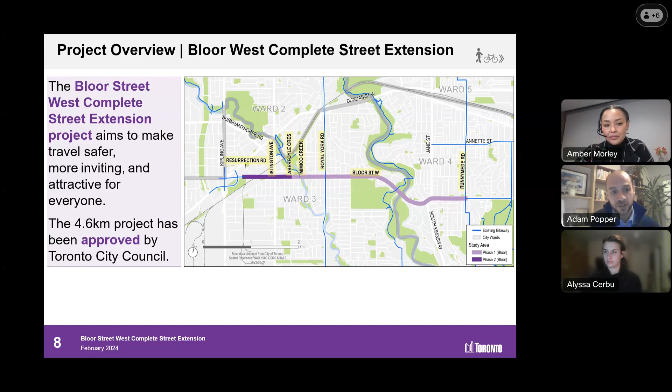So some of this content may be familiar to those of you who came to the public consultation and were involved throughout the project. The project goals fit into 4 categories: to improve safety for everyone, people walking especially, cycling and driving; to enhance the walking and cycling experience; to support the qualities that make Bloor Street West a place, so it's not just something to move through, but a place in and of itself; and to maintain roadway space for transit, emergency services, deliveries, shopping, and commuting.

So this project is built on a foundation of policies that are also approved by Toronto City Council.

For example, the Toronto official plan has a variety of goals, some related to transportation, including making Toronto a walking city and bringing all Torontonians within a kilometer of a designated cycling route.

The Road to Health is an important document that helps us understand the connection between physical activity and the associated risks of obesity, type 2 diabetes, and cardiovascular disease, as well as some cancers when physical activity isn't a part of people's everyday lives. TransformTO is the climate action strategy.

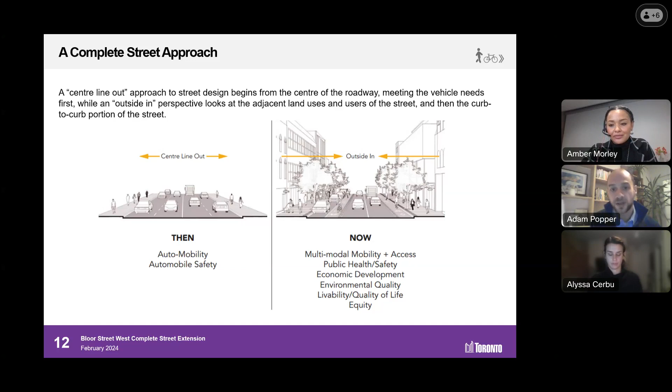So we take an outside-in approach. The Complete Streets are based on 3 broad principles: streets for people, streets for placemaking, and streets for prosperity.

So how does that actually play out on streets like Bloor? When it comes to prosperity, it means working with BIAs, working with the CafeTO program, and creating loading and parking opportunities. Placemaking is about public art, places to sit - making the street more than just a place to move through, but a place in and of itself.

Streets for People is about universal accessibility. It's about safety, and it's about making those connections between walking and transit and all the other ways that people move on our streets.

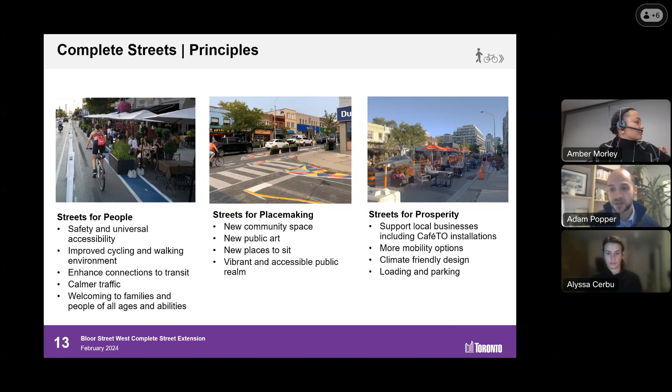The Vision Zero approach is based on an action plan in Toronto and similar ones right across the planet. The idea is that we want to bring traffic fatalities and serious injuries down to zero. In the past, we thought of traffic fatalities as inevitable - we see them now as preventable.

Previously we tried to reduce all road collisions. Now we want to prevent those collisions because we believe that no serious injury or loss of life is acceptable. Rather than being reactive, we take a systemic approach, applying best practices, applying context, and being more proactive.

A key point here is about lowering speeds. This is fundamental to Vision Zero and about creating places on our streets. This isn't just about lowering speed limits - it's about lowering the design speed of the street. That means making it feel, when you're driving, like you're going at the appropriate pace for a street.

We can do that with lane widths, the number of lanes, as well as with context like the buildings and trees that frame the street. What we find is that when speeds are lower, drivers stop more quickly, their reaction time takes less, and when collisions unfortunately still do occur, there's a lower chance of death when speeds are lower. So the fundamental design goal of lowering speeds saves lives.

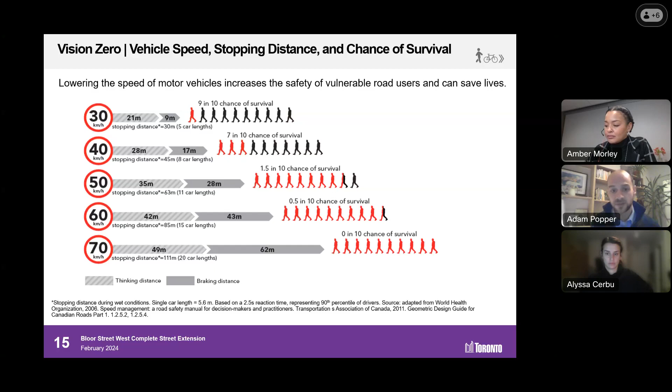We have many streets in Toronto. Most of them, and the most kilometers, are local streets. We also have a few expressways and collectors. But what we find is that the number of fatal collisions tends towards arterial roads, like Bloor, like many of the major roads in our downtown area as well as in the suburban communities. So we target many of our Vision Zero interventions on those arterial roads so that we can be strategic and ultimately save as many lives and prevent as many serious injuries as we can.

Bringing that home to Bloor, as part of the consultation you may remember some of these slides, but it takes a deeper dive into the 20 collisions that involved fatalities or serious injuries along the corridor, looking at some of the places where they were most concentrated and the trends over time. We look at all these collisions and their details when we get into the detailed design to see if there are trends that can be avoided through a redesign, and it also helps us provide a baseline so we can measure against it over the years to come.

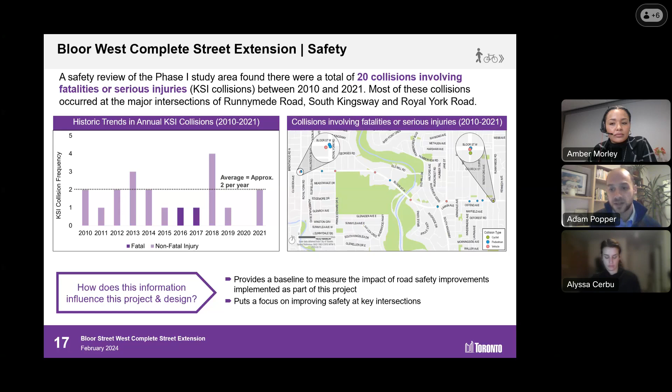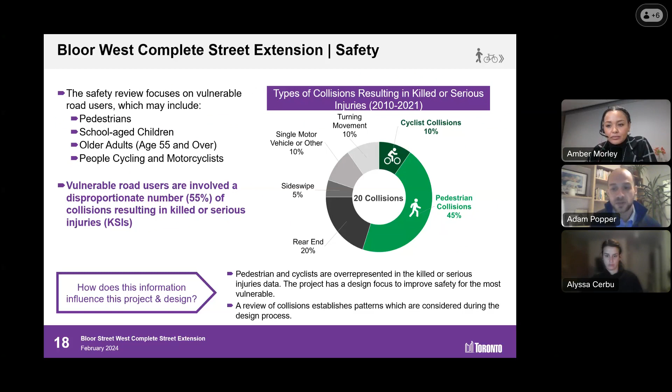For those 20 collisions, we looked at who was involved and how they came about. 45% were pedestrian collisions, 10% involved people cycling. This means vulnerable road users, including pedestrians, school-aged children, older adults, people cycling, and motorcyclists, make up 55% of the collisions resulting in killed or seriously injured on this part of Bloor Street West.

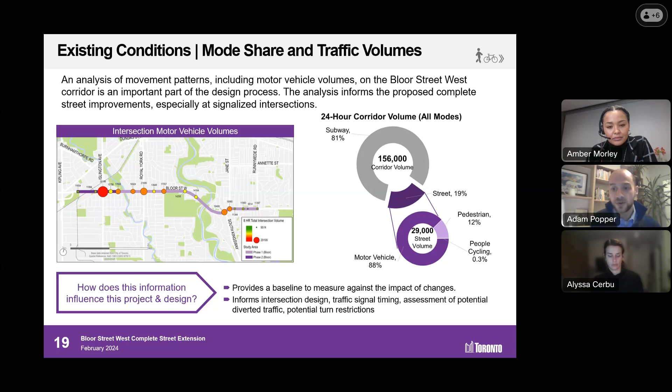We also looked at mode share. One important thing to remember is that Bloor has a wonderful transit service running underneath. The street carries many vehicles, pedestrians, and cyclists, but the vast majority of people traveling along this corridor do so by transit. This means street space can potentially be repurposed for other uses to achieve Vision Zero and Complete Streets objectives.

Many of you have asked what the project timeline is and what's coming up. So I'll do a quick recap of what happened in 2023. Preliminary design began in 2022, with consultation with businesses and key interest groups in the early part of 2023.

In March and April, we sent a notice to almost 34,000 residents, held 2 in-person consultation events, an online survey, and several meetings with other interest groups before then.

In May and June, this project was considered by Toronto City Council, and before that, its Infrastructure and Environment Committee. We heard deputations from members of the public and stakeholders on this topic. It was ultimately approved by Toronto City Council, which gave staff our marching orders to install the project.

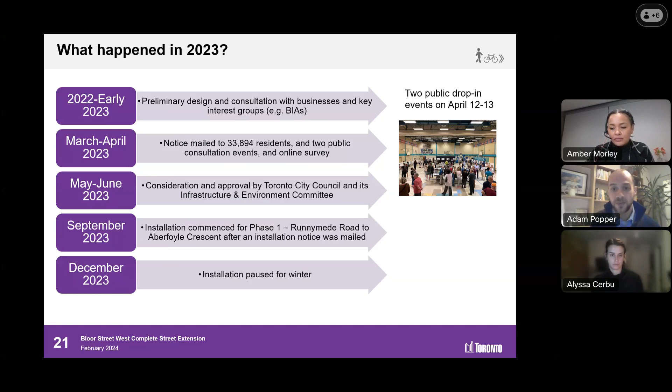Installation commenced at the earliest opportunity in September with the reconfiguration of the roadway and the subsequent installation of other elements such as curbs, bollards, and detailed pavement markings. In December, we paused installation because it's difficult, and in some cases impossible, to install pavement markings that will actually adhere to the roadway during that time. So we will recommence in the spring.

So what to expect: in the spring we'll complete phase 1 installation and do some adjustments, which I'll go over in detail. Phase 2, from Aberfoyle Crescent to Resurrection Road, will be installed, along with traffic signal modifications and retiming for safety and efficiency. This is right along the corridor, starting with phase 1 and then phase 2 after its initial install.

We'll also be conducting counts and coordinating with CafeTO installations. Over the summer and fall, we'll be upgrading some intersections to increase parking, straighten the bikeway, improve placemaking, and in one location, add a sidewalk where it's missing.

We'll also be continuously updating our website. Those of you here tonight are clearly interested in the project, and a lot of information already exists there. That will be a continual update, so please keep checking back as the project unfolds.

In the fall, we're looking to meet again with the public about the difficult intersection of South Kingsway, Mossom Road, and Riverview Gardens. It's not in Councillor Morley's ward, but it's a really important part of this community and of how people move through it in various modes. So to untie that knot and figure out the long-term vision, we want to meet again with the public on some long-term options.

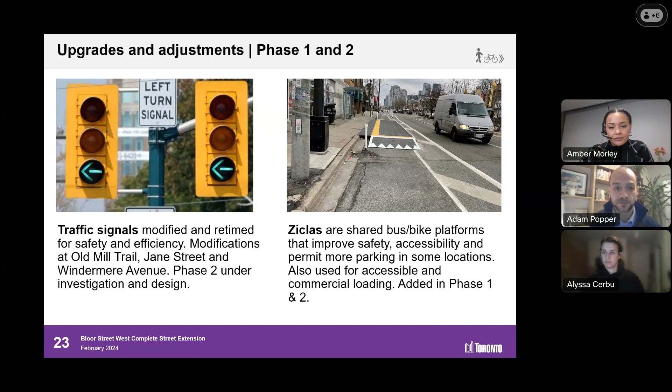Some other, quickly, you've seen some decorative curb extensions. More are planned in the BIAs in conjunction with their input. Some of the green paint that helps clarify the roles and responsibilities of various road users will be put out at the earliest possibility. I mentioned CafeTO installation, and we can speak to that a little bit later,

but ultimately, as businesses submit for CafeTO permits, they will be referred to us, and we will look closely with the CafeTO team to make sure that as many as are feasible can be installed and the road reconfigured into a summer conversion versus where it is now in its winter format.

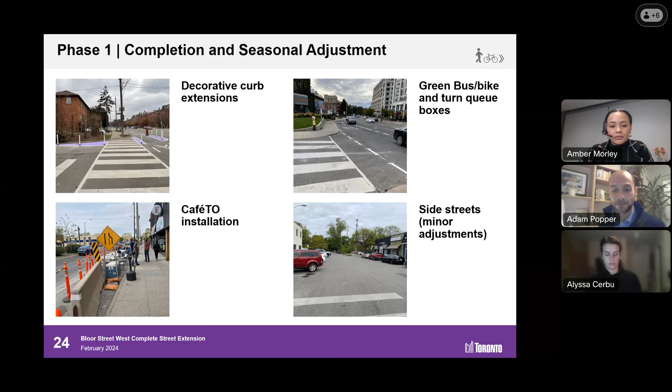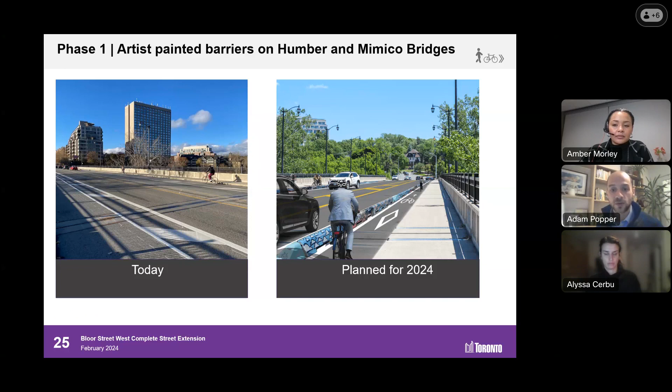So today, right now we do not have physical separation on the 2 bridges. What's planned is toward the end of this year will be physical separation that is covered in paint through an artistic program also run by some of our colleagues in transportation services. So you may have seen many of the murals around the city, as well as on Scarlett Road. There's some painted barriers similar to this. And so this is a wonderful Street Art Toronto collaboration.

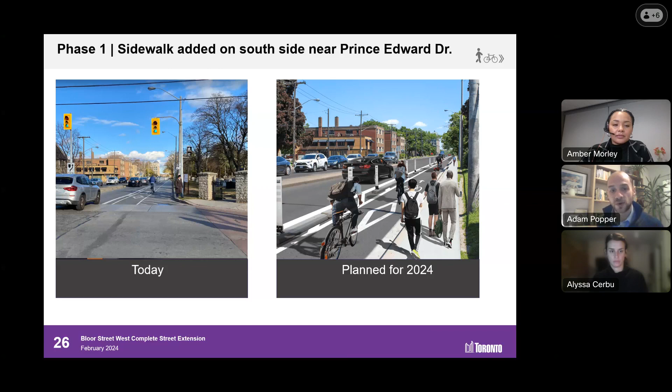We're also looking to add the missing sidewalk. So you see on the left photo today, people are walking on what is essentially a painted sidewalk. What we're looking to do is physically build that out with a proper sidewalk that is accessible for people of all ages and abilities who want to walk on that side of the street.

So here's a concept that we're working on for Grenview Boulevard as one example, but we're doing many similar interventions elsewhere. What you see here is a top-down view of Grenview going vertically and Bloor going across the screen. What's red is what will be the future. And so, Tanisha, if you could please click the next slide, you'll see that one of the things we're trying to do is physically raise the crosswalk for pedestrians.

This makes them more visible to drivers. It also forces drivers to slow and go up to the pedestrian level and then back down. So it's basically a speed hump meets a crosswalk. The other thing this does is it keeps people's feet dry in the winter when there's puddles. So it's not just about safety, though that's the core reason, but there's also a convenience factor as well.

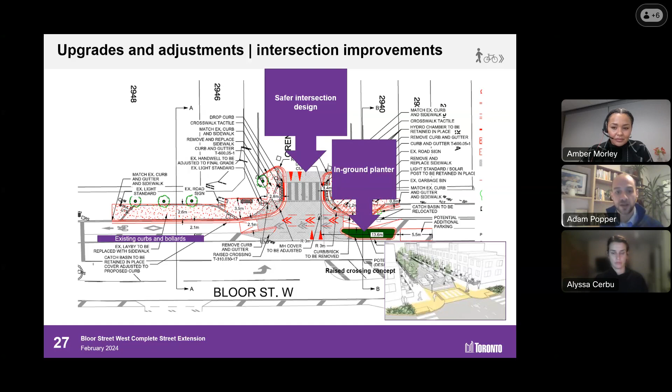We're also looking to improve in-ground planters, so providing green infrastructure wherever we can. And this also is in an attempt to straighten out the bike lane. Through the Kingsway and the Bloor West Village, there have been installed bump outs to create more space for pedestrians. We're proposing to put that slightly more on the side street, straighten the path, and thus create more parking space. So where that's feasible, we'll add it.

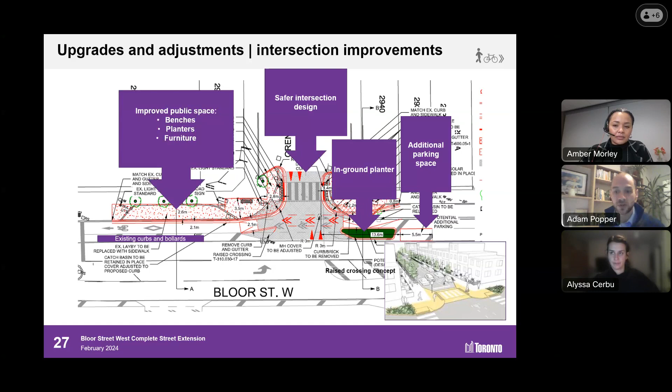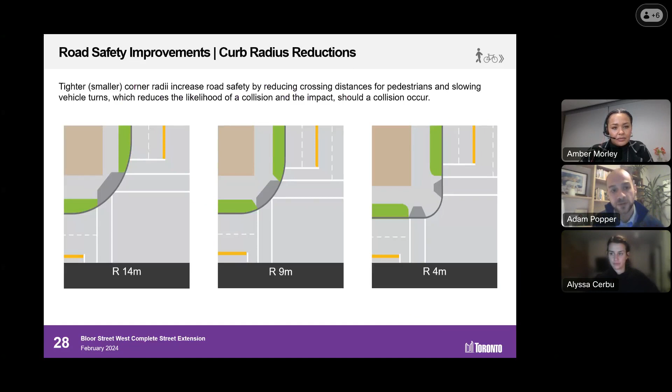And then we're also looking to work with the BIAs to improve public space, benches, planters, street furniture, again, where space permits. So that's just one example. And when we do this, we take the opportunity to improve the curb radius. So this is to slow turning drivers, shorten the pedestrian crossings, and make people more visible. Here's an example of that.

Phase 2 will also be installed. This is on our public website, and we'll be posting the final plans as well, so people can see what the actual intersections will look like, how vehicles and pedestrians and cyclists will interact on the street.

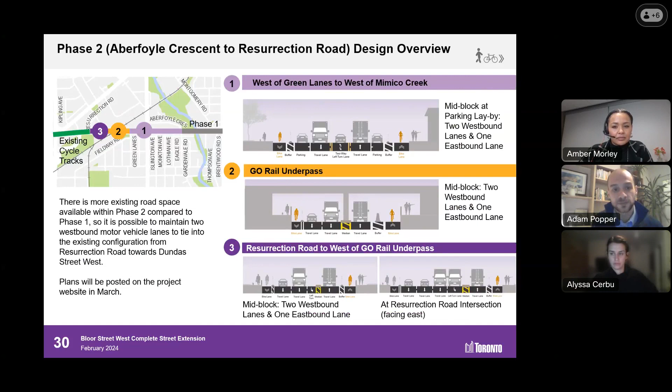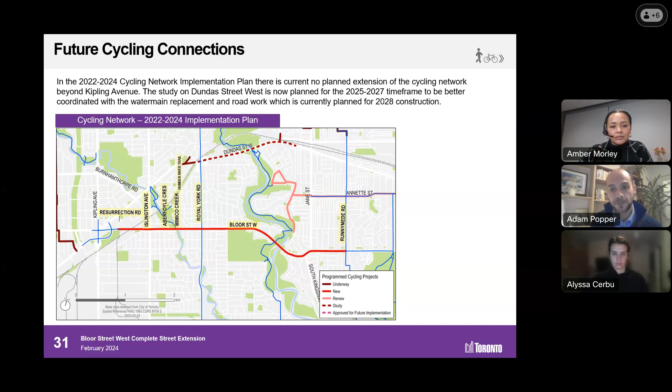Many of you have asked about project costs. The installation of phase 1 was approved by Toronto City Council, and the process for awarding a contract followed all of City Council's procurement and cost control bylaws and policies. The initial contract was valued at just over $3 million net of all taxes, and the total project budget to date is estimated to be $4.5 million.

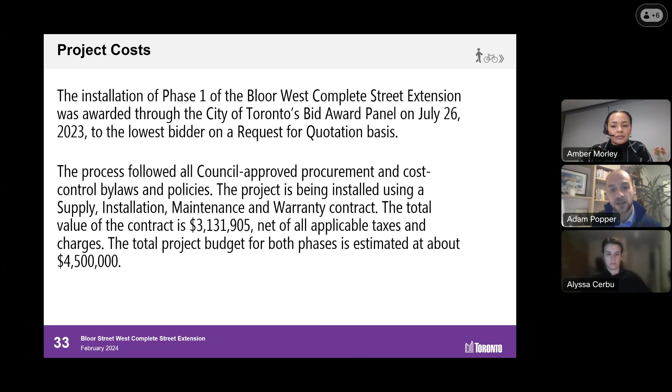Back to you, Councillor. Thank you, Adam. I really appreciate you taking us through those details, and for the work that your team have been doing on an ongoing basis. I know you're hearing a lot from us, and we appreciate your engagement both with our office and with the wider community. So we're going to get into questions.

As mentioned, as we've seen, we have questions asked by 159 people. We've got about 150 people, I believe, on the call tonight. And unfortunately, we won't get to all the questions that folks have posed, but we have tried to group them together to really make sure that the information most sought after is discussed here tonight.

So if we could have the next slide, we're going to get into project measurement. This is something that I think we all are very focused on. We know that this is a new offering to our community. Traditionally, people don't always ride bikes through this part of the neighborhood. And so how we continue to monitor and look at that is really critical.

What measures before the project was installed were in place, and what measurements are planned for after installation, including what data and studies will be shared publicly? So Adam, whomever on the team you'd like to take that question, over to you.

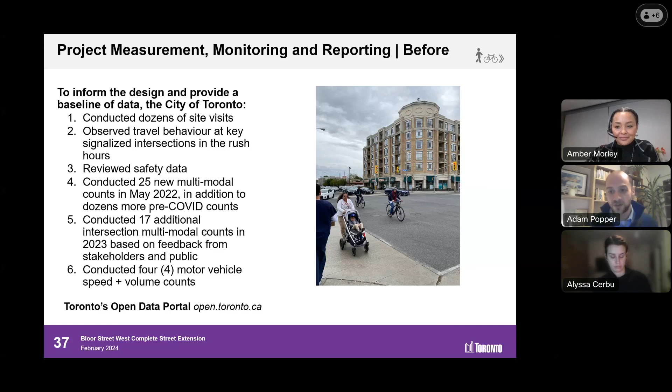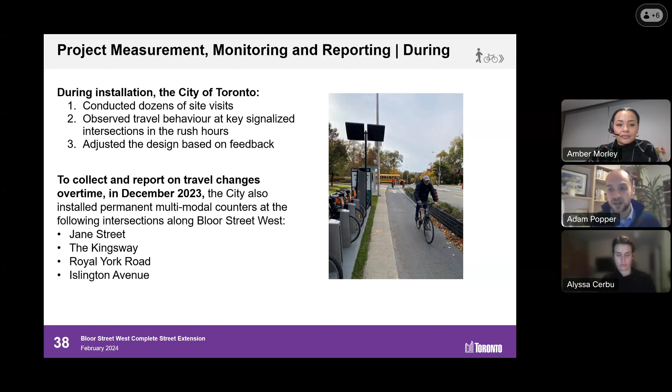So during the installation timeline, we conducted dozens of site visits again, always observing travel behavior, learning about the project as we install, and adjusting the design based on feedback. Also, in December of last year, we installed 4 permanent multimodal counters at the 4 intersections listed below. So only Islington will be considered a before count, but what these allow us to do is monitor the project as it takes its shape over time. So that's Jane, the Kingsway, and Royal York.

After the project, we will monitor and report on the project. We'll continue to conduct site visits and observe travel behavior. We plan to recount at several of the intersections, again looking at May as the month, so we compare apples to apples. And we continue to receive and respond to feedback, including potential design adjustments. So what we've done for other projects, we plan to do here as well, and that's to release project update PDFs and dashboards that will have a plethora of information.

At the earliest, we're talking about late winter for the first project information update. It will have a limited amount of data because May is going to be a big moment in the project for data collection, but you'll still see something come out soon, especially focused on vehicle travel times.

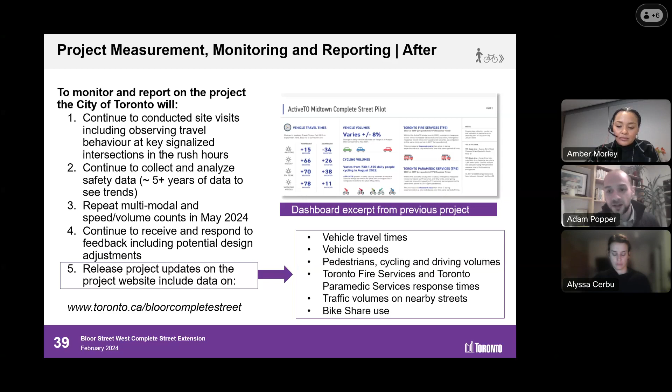As we release more information: vehicle speeds, pedestrian, cycling and driving volumes, as well as, as we have on other projects, summaries from Toronto Fire Services, Toronto Paramedic Services, and traffic volumes on nearby streets. So if you go to toronto.ca/ that should say Bloor West, you'll find more information about that as it unfolds.

Fantastic. Thank you so much, Adam. The next question we have to dig into here is how can we improve the traffic flow and congestion? You did cover a little bit of that in the overview of the project, but are there additional opportunities to change signal timing to improve this as we go along? And can you dig into that a little bit more for us?

Yeah, for sure. Ultimately, the answer is yes. We are looking not to create congestion, but to alleviate it. It's one of the goals of transportation services generally to make travel more convenient and safer for everyone. We are looking to do so from a multimodal perspective. And one of the ways we can do that is by retiming traffic signals.

So what does this mean? This means coordinating the signals so that they have the same cycle length, so that when you're driving at the design speed, in this case 40 kilometers an hour, you'll be able to move through multiple signals at once. We're also looking to reduce delay at intersections. So where there are many more vehicles than there are seconds in the minute for us to allocate green time, we try to rebalance that as much as possible. So that means in some cases, taking a few seconds away from the north-south and giving it to the east-west.

I want to acknowledge, however, there's limitations in that process. For example, Royal York, where there's a lot of demand from both the east-west and the north-south, is especially important to the TTC because if Royal York gets backed up, they won't be able to get their buses in and out of the station. And so we work closely with Toronto Fire Services, with traffic signal operations experts in this field, as well as the TTC, who look in very great depth at our traffic signal models to make sure that we're moving everyone and balancing all the objectives on the project.

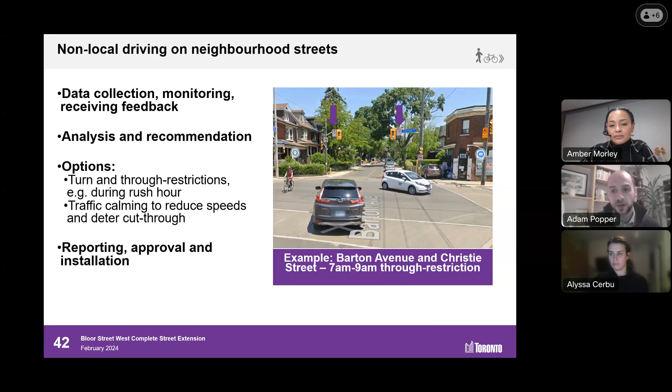I would just jump in to say, Adam, that we are very aware of community concerns about traffic and speeds on local streets, particularly around schools and where communities are walking. Many of the streets in the neighborhood don't have sidewalks, and ensuring there's safety on those streets is utmost important to us as well.

The traffic calming policy, for example, was recently approved as an update by City Council to make it easier to implement various traffic calming methods. So those of you who may have engaged with local councillors before about opportunities for traffic calming may have had a hard time seeing those come to fruition, but these updated traffic calming policies are a little bit easier to navigate, and for councillors to bring forward where that's the recommended option. So I wanted to add that in as well.

Thank you, Jacqueline. I was going to highlight that as well, so thank you for beating me to it. Thank you, Jacqueline, and thank you, Councillor.

So one of the questions was, did we consider other routes? And I think the answer is yes. Probably the best way to answer that is, well, why was Bloor selected? Why is Bloor in the cycling network plan at all? Why is it prioritized in this phase of the cycling network plan?

So we have our existing cycling network. This you can get from a map at your local bike shop. Next slide.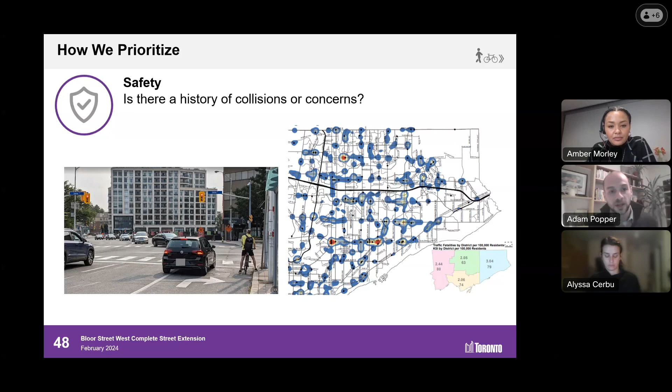Equity is about neighborhoods that are underserved by transportation options. That's another piece that goes into how we prioritize routes.

How many people are currently cycling? We know that at street level, approximately 0.3% of people prior to install were cycling along Bloor compared to other modes. Some people have said, well, that's not a lot, why are you prioritizing cycling? That is one factor that contributes to how we prioritize.

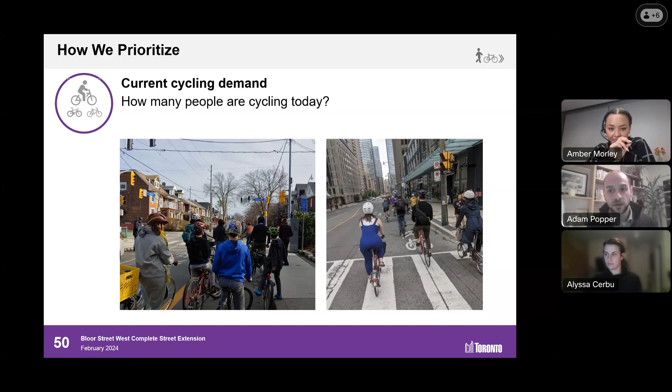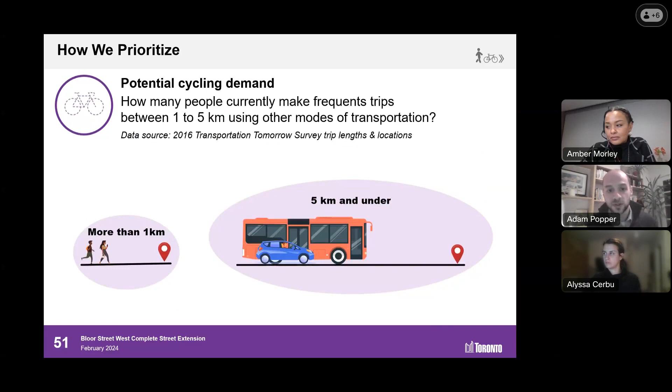Another factor is, what is the potential cycling demand? So how many people are making trips frequently between 1 and 5 kilometers using other transportation modes? These are trips that could be replaced by a cycling trip, which are typically under 5K.

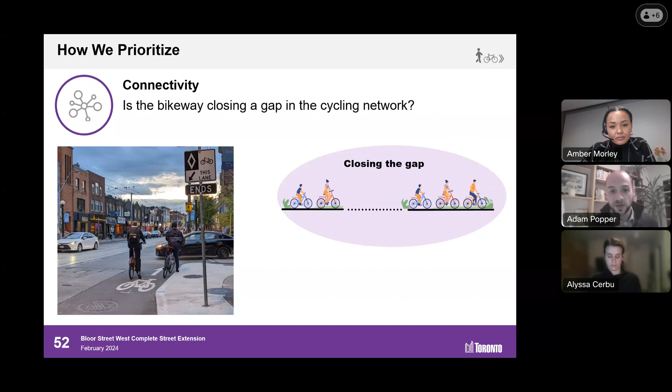Connectivity is a big piece, and one that definitely applies to the Complete Street project we're talking about today. The network coverage, so is this bikeway being considered where there are not currently a lot of cycling options? This harkens back to the official plan goal to bring bikeways within 1 kilometer of all residences.

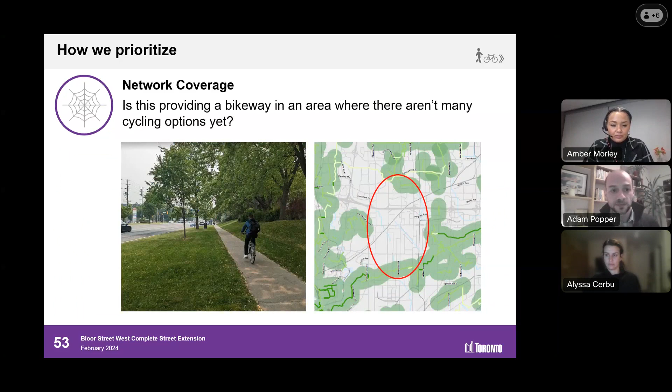Trip generators, are there many trip generators around and on the route? Bloor is a wonderful place, it goes through 2 very busy commercial areas. Those add to the trip generators where people want to go and people want to start from.

Transit access scores highly again because of the bus routes, but most importantly, the high volume transit in the GO train stations and especially the TTC subways. Many of the neighborhood streets around not only don't connect with each other beyond a few blocks, but they also don't cross 2 of the major barriers that Bloor does cross, which are the Mimico Creek and the Humber River.

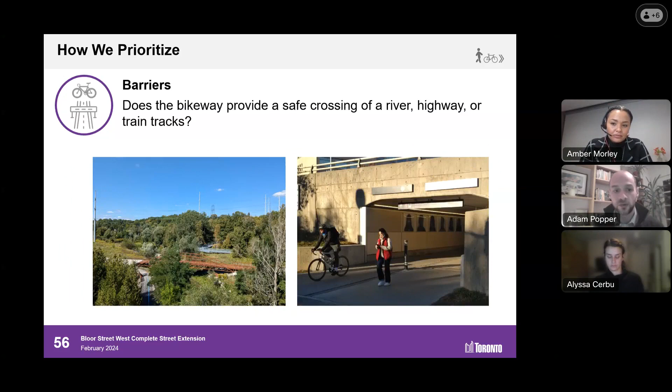The other goal is to create a major citywide cycling network. Think of these as sort of the highways of the cycling world. City Council approved in 2019 an overall structure for the cycling network plan and sought to build 500 kilometers of these major citywide routes, and Bloor is one of them.

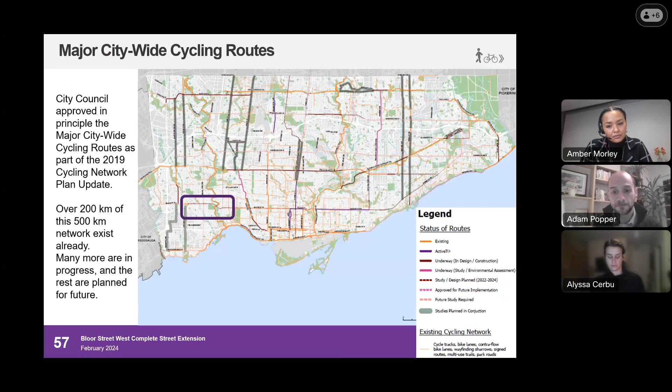And then the highest priority ones make their way into the nearest term cycling network implementation program. So right now we're in the 22 to 24 near-term program.

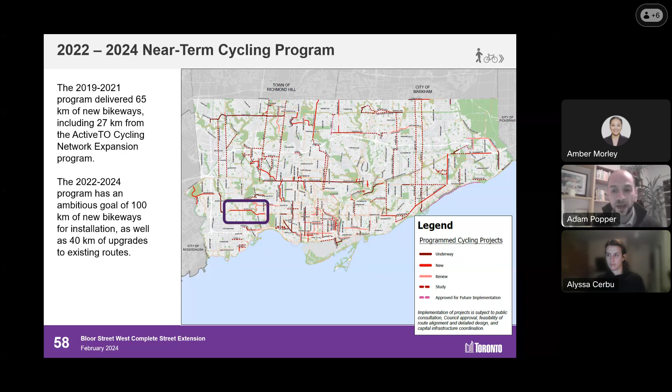At the end of last year, some of my colleagues consulted the public on what should the next phase be. So we bring some of these analysis topics to the public and say, did we get it right? Are these the right routes? What else should we consider? That plan will be brought to council in the coming months.

So here we find ourselves on Bloor and this particular project, and it was nominated as part of that plan, the 2022 to 24 plan that was endorsed by council in December 2021.

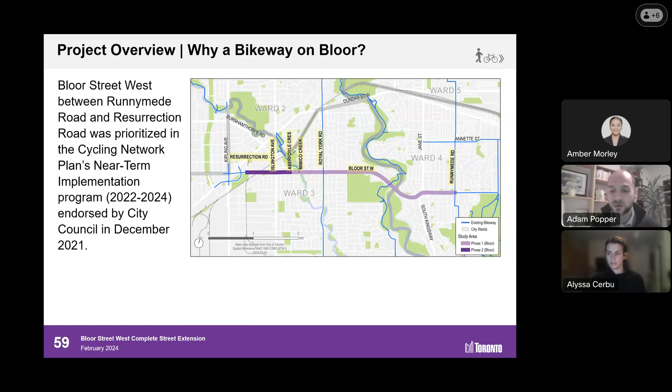So broadly speaking, why do we build a cycling network? Well, one reason is that cycling increases over time as we add bikeways. For example, the original Bloor Street bike lane showed that after installation, 56% more people were cycling than before it was installed. This trend applied to the extension between Shaw Street and Runnymede Road.

Behavior change takes time, it doesn't happen immediately. As the network is built out and further connections are made, more people find reasons to ride bikes and are able to connect using that network.

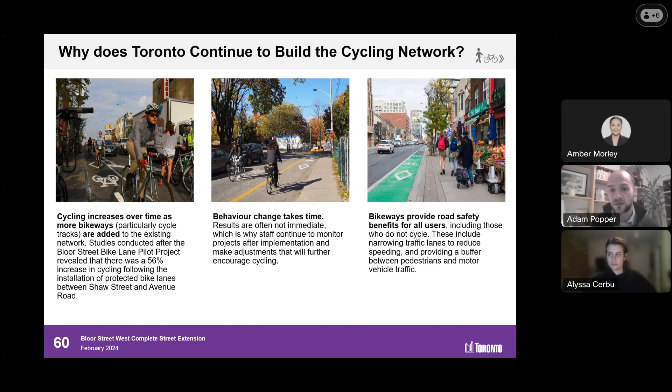They also provide benefits to other road users. So people walking feel safer because they're further away from fast motor vehicles in many situations. We also have learned that by installing bikeways, we decrease speeding, people driving, and reduce the severity of collisions.

Again, looking at the Bloor Street bike lanes, the same number of vehicle-bicycle collisions occurred, but there were many more people cycling after than before, which shows that there was a reduced collision rate.

We also took intercept surveys of people arriving in a variety of modes on Bloor, and found that everyone felt safer. Motorists felt safer because cyclists weren't weaving in and out, and they were more able to predict where cyclists were going to be. Cyclists felt safer after than before, and pedestrians as well.

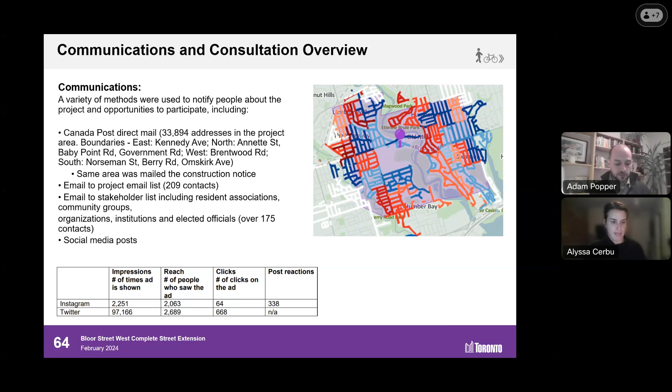As far as consultation activities, I'll go in order here. The first thing we wanted to understand is business delivery and loading needs. Specifically, Bloor is a major commercial corridor with a wide variety of businesses on there. So we sent this survey out to the various businesses and addresses and collected about 72 responses, which shaped initial design specifications.

We also hosted individual stakeholder meetings with a variety of business improvement areas, or BIAs, various businesses that we identified as having specific challenges, concerns, or feedback that they needed to share with us, as well as various residents associations and ratepayer groups.

I've listed the individuals who we met with, but some of those we met with several times throughout that process. We also invited all of these stakeholders out to a stakeholder meeting. They were presented the exact same information that was shared with the public, and we had about 26 attendees from a variety of organizations at that meeting.

In addition, hopefully a few of you who are joining this call were able to join our public drop-in events. Those were held in mid-April. There were two events, one at Swansea Junior Senior Public School, as well as at Etobicoke Collegiate. In total, we had about 300 or more attendees over the course of the two events.

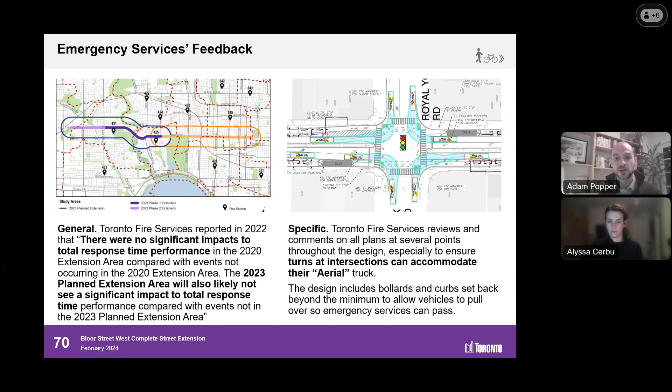Glad to know that it's an ongoing piece of the monitoring and an ongoing conversation and collaboration. I know residents in my office are very keen to keep an eye on that piece.

Thanks for that, Adam. This next question is for me: what would it take to reverse the decision and change Bloor back to four lanes of traffic? As some of you may know, this project was actually adopted by City Council before I took office back in 2022. The cycling network plan was approved by council at that time, and it did in fact include this particular extension of complete streets along Bloor West.

It has since gone through a number of iterations that I have wholeheartedly supported, and I do continue to be in support of this project. As we heard here tonight, there are a lot of really important initiatives and priorities that we have as a city, and we will not arrive at those destinations if we do not put our money where our mouth is

and take bold action to make it happen. So we have a growing community whose needs need to absolutely be met. Safe, accessible streets for everyone is a priority for me as your councillor. We do need to continue to work actively to contribute to our climate goals through active transportation and ensuring that the safe infrastructure exists for people to make that choice.

And then, of course, Transform TO, which is our climate action strategy, sets an ambitious goal for residents to walk, bike, or take transit for 75% of school and work trips under 5K by 2030. So it is an ambitious goal, but I do think that it is one that's keeping the wellness, well-being, and health of our communities in a sustainable way well into the future at the forefront.

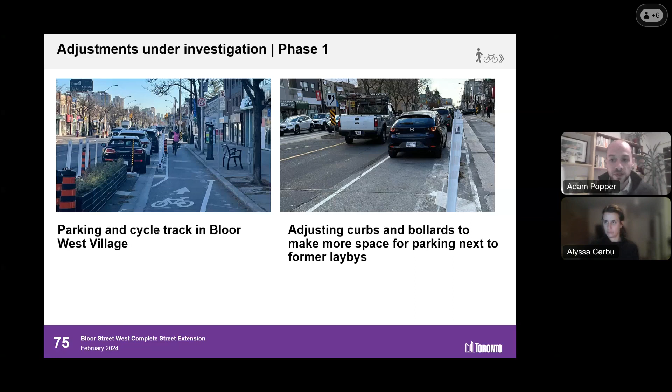I won't get into the minutia of the detail of how we look at all the contexts, but just enough to say that we're looking at this so that we can make sure that all road users, including people getting in and out of their vehicles or getting picked up and dropped off, can do so and feel safe. So mostly thank you for your feedback, and you'll be hearing more on this in the future. Thanks, Adam. It's a really important one, I know, for so many people, myself included, that we really work to get that one figured out.

So this one was sort of a general number of additional questions. Again, we can't get to them all tonight, but we do look forward to continuing to receive them and to discuss them internally, staff to staff, as we work to continue to make this project the best that it can be. But this is bringing up some other questions related to CafeTO, pavement markings, right turns, winter clearing, and more. So can you talk to us briefly about the plan for CafeTO? How many patios will there be this year?

And what do the new pavement markings mean? How can we safely turn right? And then finally, of course, how are bike lanes cleared during the winter months? We want to, of course, see an uptick in the use of this important infrastructure, and of course, want to ensure that there's a plan to make sure it's accessible. Over to you, Adam. Thanks.

I'll speak quickly about maintenance. With pavement markings, it really depends on which ones you're talking about, but we want to make the street feel safe and be safe. And so that's our laser focus. If you have specific questions about a particular intervention or design, feel free to take a snip from the website where we've released all the plans in PDF, send it to us by email, or take a photograph and say, hey, why is this like this? And we'll be able to explain it to you.

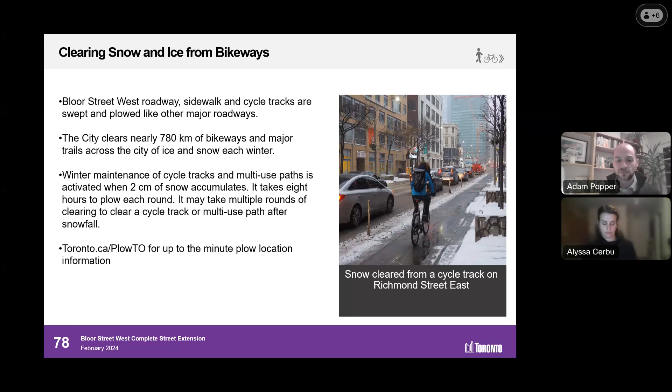Fantastic. Thank you so much, Jacqueline and Adam. I really appreciate that.

So what's next? My team and I obviously continue to work really hard on this issue. We want to get it right. And we need you all to continue to engage with us and this team in order for us to arrive at that destination. So we'll be hosting a second information session, hopefully reporting back on some of the pieces that we covered tonight and giving more in-depth detail. So that'll be an evening on April 4th, again on WebEx.

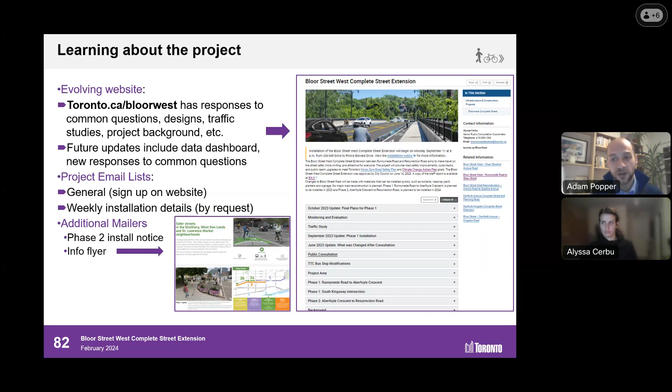So we love to hear from you. We want to hear from you. It's probably best if you send us an email. We're also available by phone. If you have general maintenance questions like a traffic signal's not working or potholes, go to 311 rather than using these methods. We do want to hear about what's working for you, what's not. And then if you still have questions after reviewing the website content, please contact us. We do really want to engage with you directly and through the councillor's office as well.